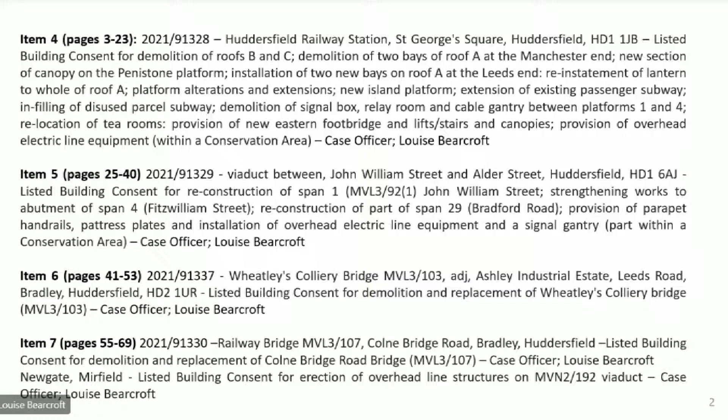So the purpose of today's committee meeting is for officers to brief members on 9 listed building consent applications which have been submitted by Network Rail. The works for which listed building consent are sought are required as part of a scheme to upgrade the railway between Huddersfield and Westtown.

On the 31st of March this year, Network Rail submitted a draft Transport and Works Act order to the Secretary of State. The scheme, which runs from Huddersfield to West Town, is part of a wider programme of work to improve the Transpennine Railway between Manchester, Huddersfield, Leeds and York. The proposal is to increase service capacity and improve journey time through electrification and the provision of 4-tracking across the route. The estimated cost of delivering the project is just over £1.4 billion, and if the order is granted, would represent a significant investment in the district.

In conjunction with this, Network Rail have submitted 9 listed building consent applications which are before members today. These applications have an automatic call-in to the Secretary of State, and they will be considered at the same time as the Transport and Works Act order.

So in the interest of clarity, as Julia said, it is the Secretary of State and not the local planning authority who is the determining body. The local planning authority do, however, have the opportunity to comment and provide any comments to the Secretary of State within a period of 42 days, extended to 45 days due to the bank holidays.

So the purpose of today's meeting is to brief members on the merits of each listed building consent application and to seek members' views on the heritage implications of each to formally submit to the Secretary of State.

There are 9 application sites which follow the route from Huddersfield to West Town. The first 2 are Huddersfield Station, which is Grade 1 listed, and Huddersfield Viaduct, a Grade 2 listed structure sited between John William Street and Alder Street.

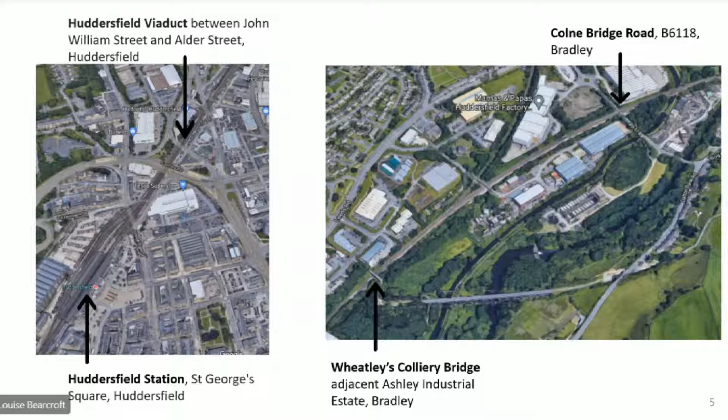The next 2 locations are bridges in the Bradley area, Wheatley's Colliery Bridge, located off Ashley Industrial Estate, and Colne Bridge Road. The next locations are at Mirfield Viaduct adjacent to Newgate, and Wheatley's Viaduct adjacent to Steneard Lane. The last 3 are in the Westtown Dewsbury area, including Occupation Bridge adjacent to Thornhill Road, Toad Holes adjacent to Watergate Road, and Ming Hill Bridge off Huddersfield Road.

The proposals within each application form a key part of the Transpennine Route Upgrade, and they have been developed in consultation with Historic England and Kirklees Council conservation officers over some years. The design development process included appraisal of alternative options to identify an approach which delivers Network Rail's operational requirements, whilst also meeting national and local policy requirements to minimise the impact on the heritage assets.

So the planning, balance and consideration of the applications take into account the benefits perceived from the railway upgrade scheme weighed against the identified harm to the assets.

For each application, there is a safeguard proposed through Network Rail's suggested condition to provide further technical detail within a Conservation Implementation Management Plan, or CIMP. This is proposed as a means to specify the various materials, techniques and task implementation methods necessary to detail the intervention works and demonstrate that the tasks will retain the authenticity, special interest and character of the heritage assets. This is a safeguard considered essential by officers and one which is welcomed.

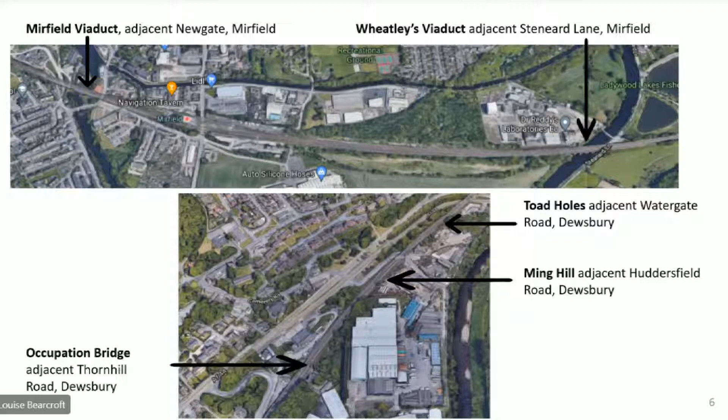So I'm Alex Davies, Head of Consents and Environment for Network Rail, and I've got my colleagues Tony Rivero, Town Planning Manager, and David Vernon, our Senior Sponsor for the scheme. Just hopefully this all works, so we're successful this time.

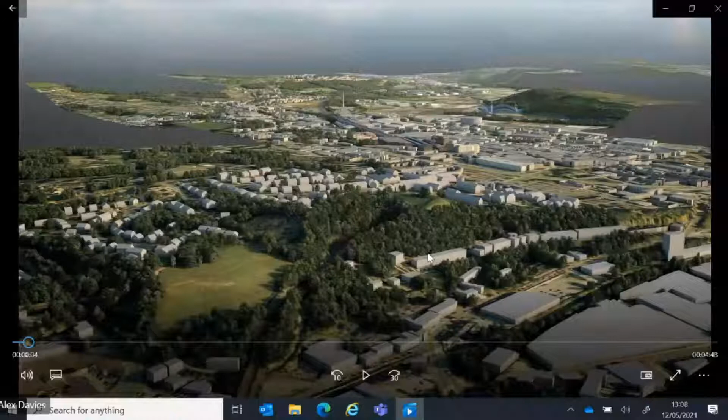So I'm just going to show you the fly-through. This fly-through was produced as part of our public consultation. I will just pause at the primary listed buildings. I'll just start the fly-through now.

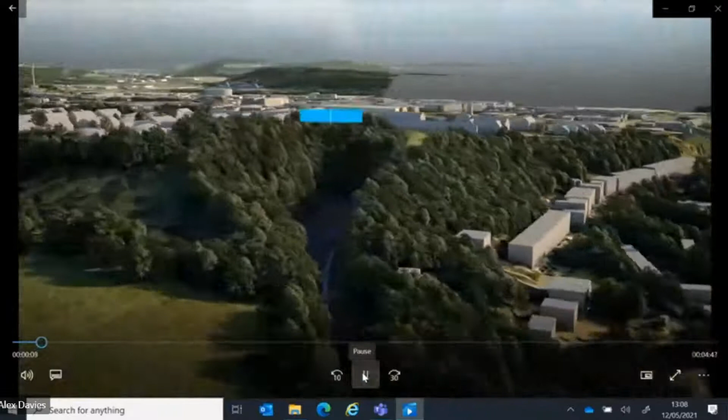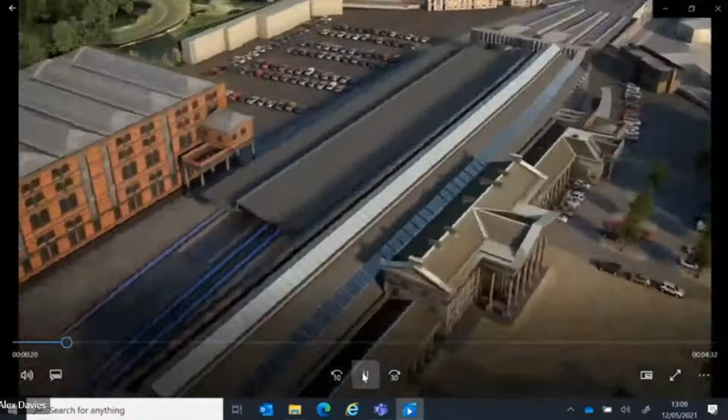So the scheme starts at Springwood Junction, just outside Huddersfield Station. As we go over the tunnels, we're doing works in those tunnels. And we come to Huddersfield Station, one of our key work areas. I'll just pause here for 1 second. The work we're doing here is demolition of the roofs and replacements. Roof A we're working on, extending it, and putting a new footbridge in at this location.

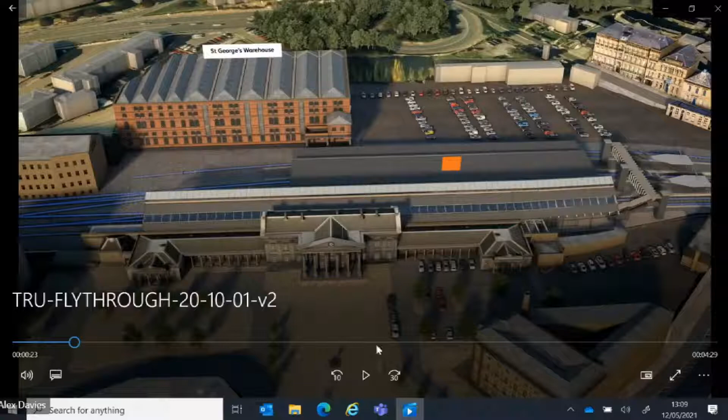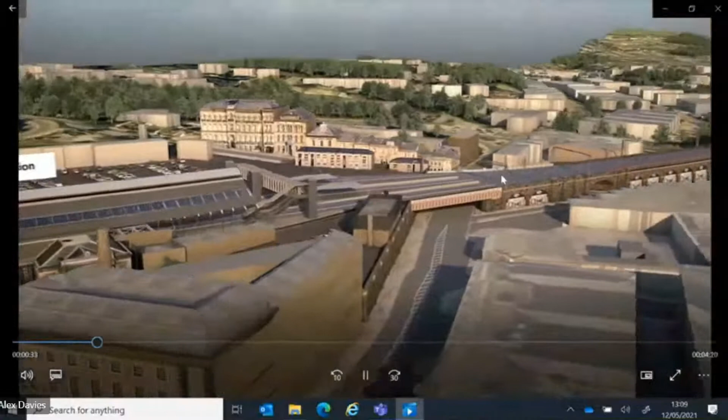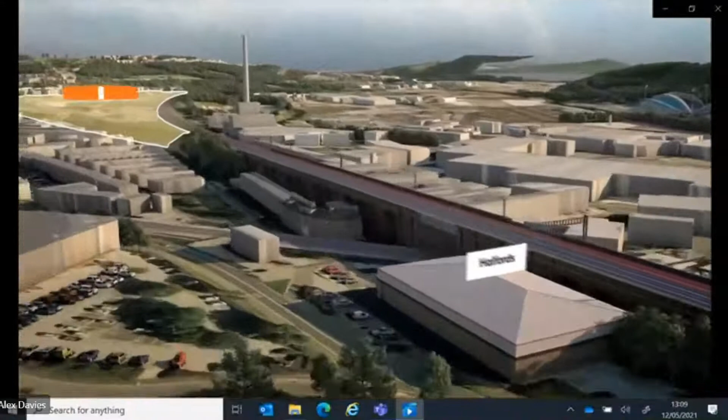I'll carry on now through the fly-through as we move across John William Street, where the bridge will be replaced to accommodate the remodelled station. Then we go to 4 lines through the viaduct, which is a listed structure, the blue and the red. We replace span 29, going through the works now. Hill House sidings is one of our key compounds.

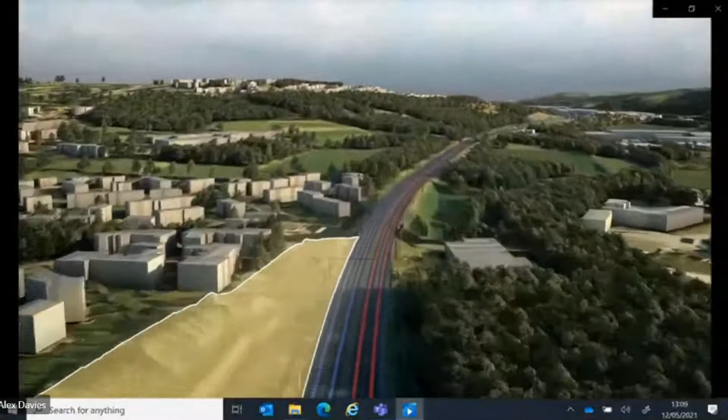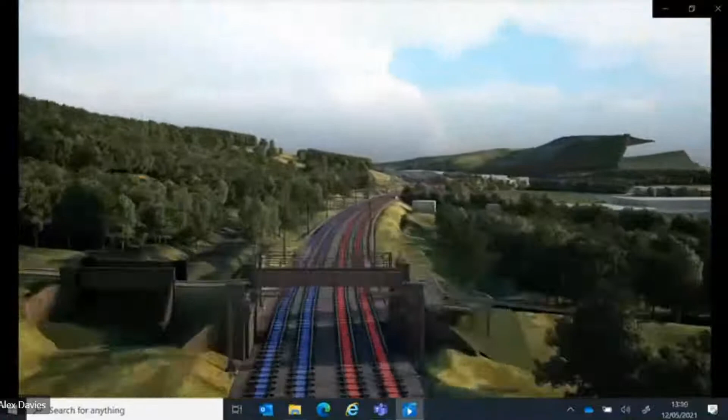This is all electrified railway as we come to the new, extended Deighton Station. The blue lines are the slow lines and the red lines are the new fast lines, so blue lines are for the stopping trains, red lines are for the fast services. And we come to Deighton Station over Whittaker Street Bridge.

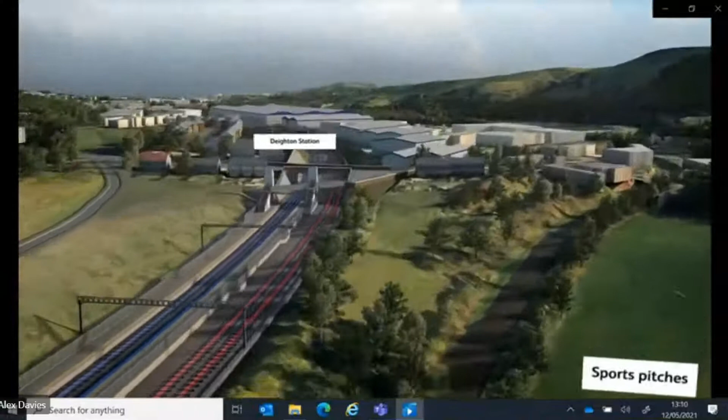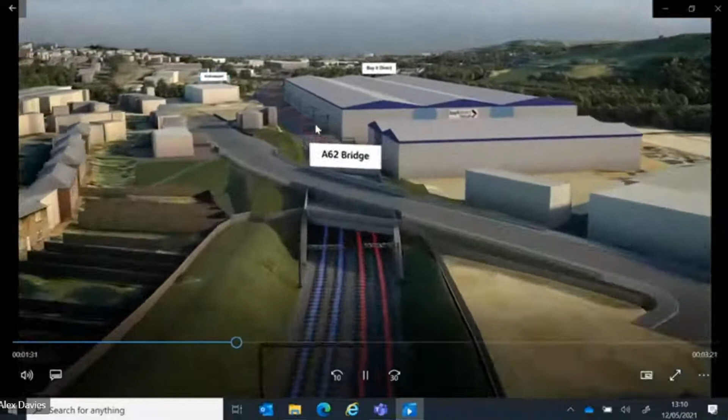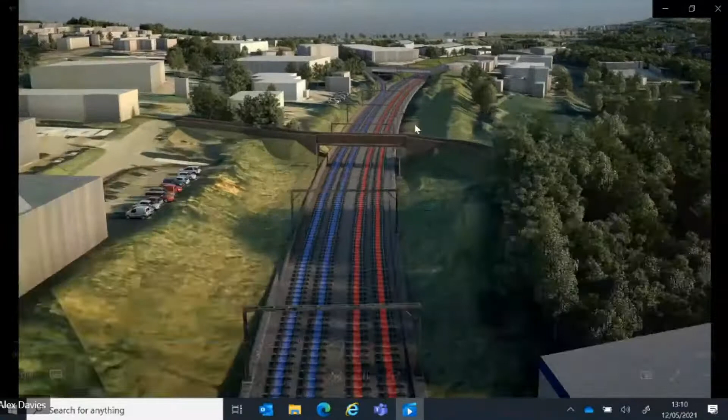We go through the A62 bridge, which will be built offline. Just pause here at Wheatley's. This bridge is rebuilt at Wheatley's, there's Wheatley's bridge. We come through Bradley Junction, and then to Colne Bridge Road, which again is rebuilt next to Bradley Access Point.

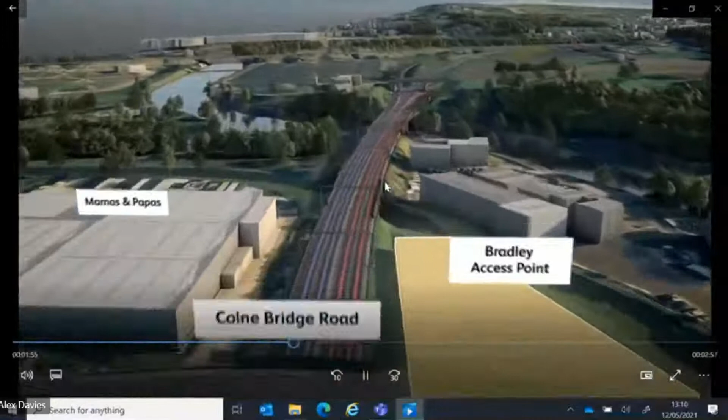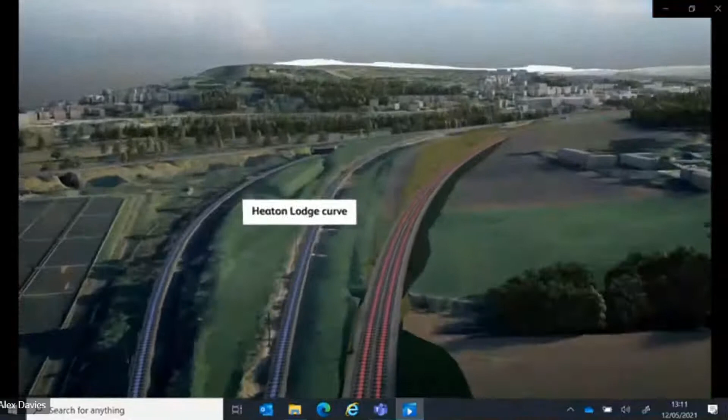Over the river, then you've got Heaton Lodge, a new line running to the right, and the slow line, the existing, to the left, and Heaton Lodge curve is built to your right there. We have the new footbridge put in for the current footpath, which runs through under the railway up to the Greenway.

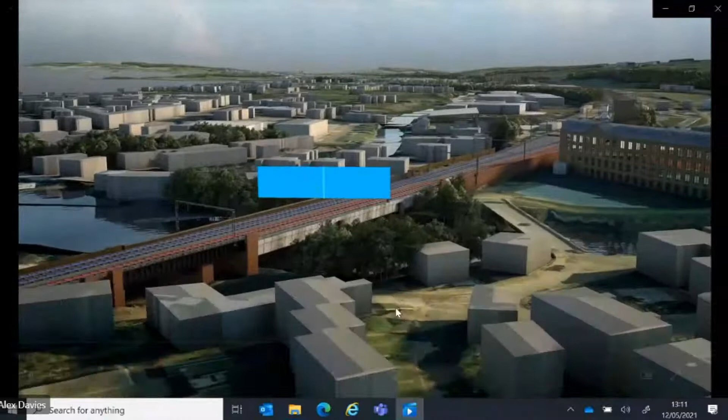Now we zoom on down to Mirfield. I'll just pause at Mirfield Viaduct as we get there very briefly. At Mirfield Viaduct, we're putting overhead lines across the viaduct - that's the primary work at this location. Go through Mirfield Station.

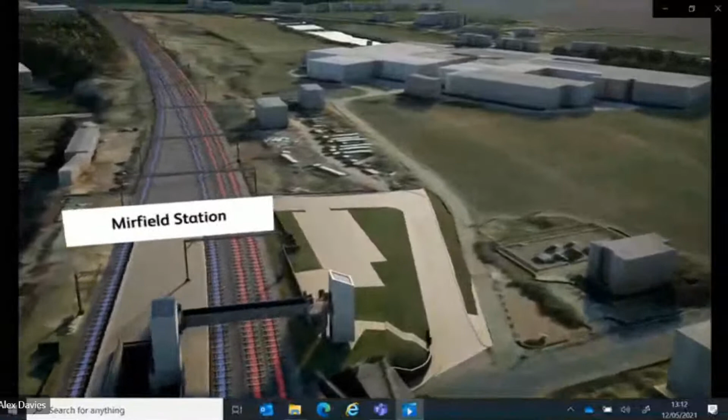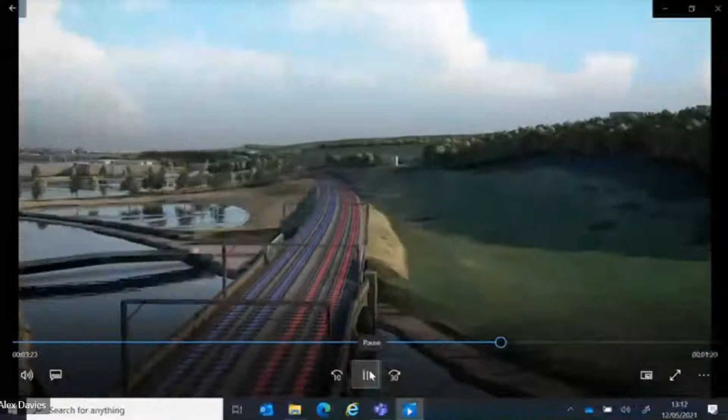Again, new lifts at Mirfield Station, new footbridge. So we come to Wheatley's. Again, just overhead line equipment being attached to that bridge there, through Sands Lane, coming up to Ravensthorpe.

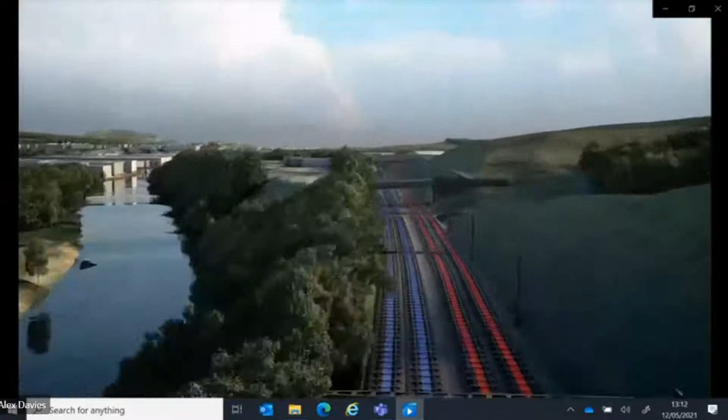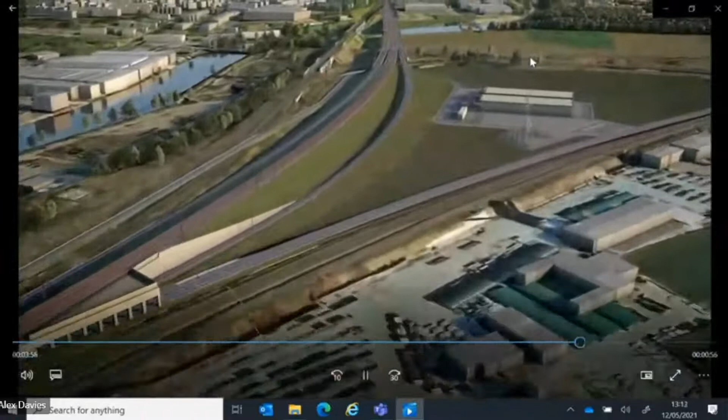Where there's a new station at Ravensthorpe to your left. Calder Road. Bridge is remodelled, and a flyover is put in to go over the canal and the River Calder, with a new feeder station to your right on the former landfill site. And you've got the Wakefield line to the right there.

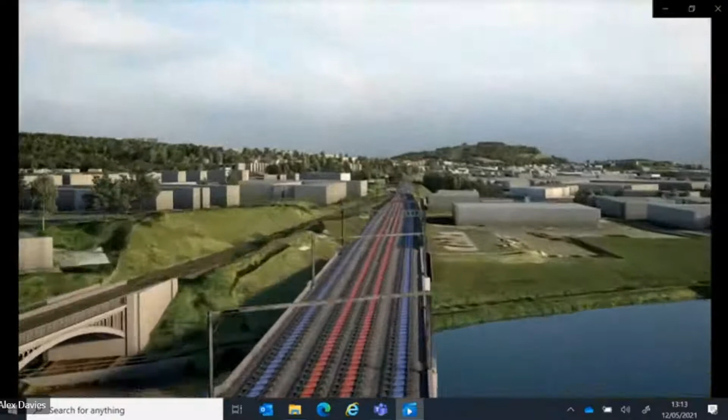And then we come to the final three listed building applications, which is Occupation Road, Toads Hole and Ming Hill. These are infills of those assets. You can't really see them from this fly through, but I'll just stop to give you a general indication as to where they are as we move round Thornhill Road Bridge.

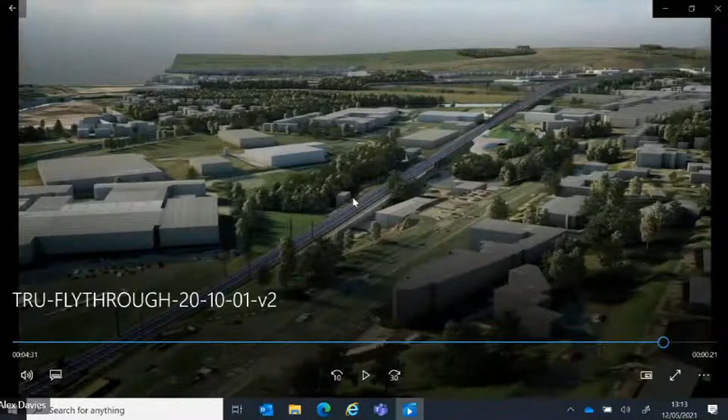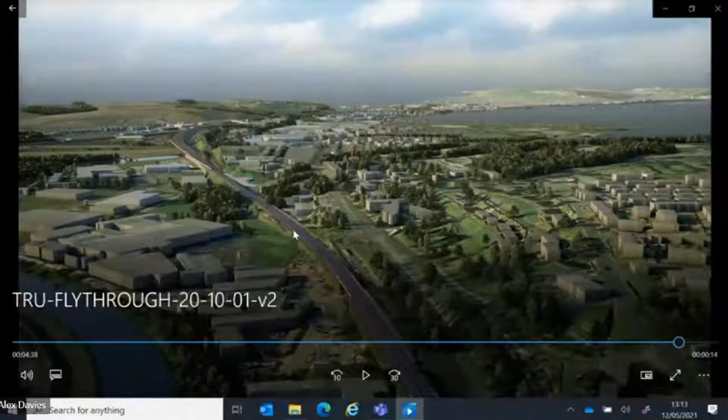So as we come to the end of the scheme and tie back in, roughly that's occupation. We're infilling there, and Ming Hill and Toads Hole are roughly there and there where my cursor is. So I'll just point those out again to you, roughly there and there. And that's the end of the fly through as we come to the end of the scheme at Mr. Sparkle's car wash.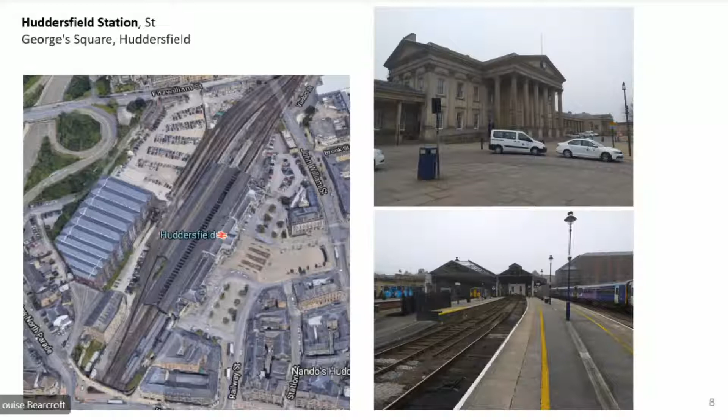And this will allow for deconfliction of passing and stopping services and to allow for the commencement of four-way tracking at this location. So this slide shows a bird's eye view of the station and its roof as existing and proposed. So the existing roof structure comprises two spans. The largest is known as Roof A, and this is between the principal station building and platform 4. The smaller is Roof B, which spans above platforms 4 and 8 and supports a cantilever canopy known as Roof C over platform 8. The proposed works include replacement of roofs B and C with a new roof canopy to a modern design, which would cover the new island platforms.

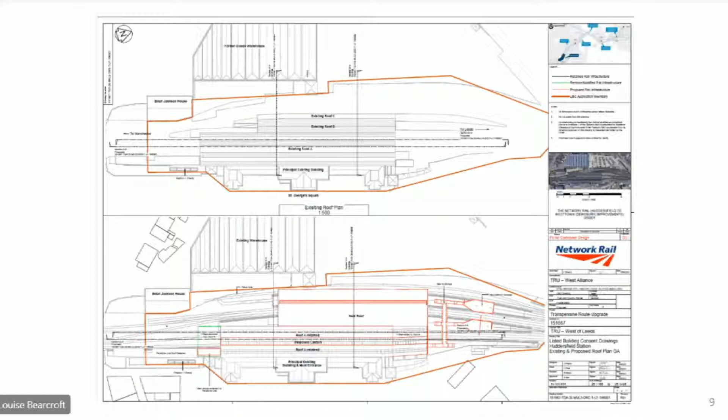The works also include the removal of 2 bays from the southern end of Roof A to allow for new track alignment, and the addition of 3 new bays at the northern end to provide additional coverage for the extended platforms. Roof A would be strengthened and the lantern reinstated, and the Penistone Line platform canopy will be extended northwards.

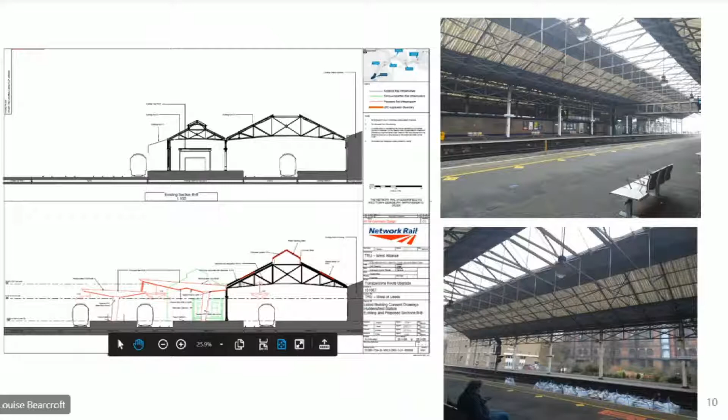This slide shows the existing and proposed roof arrangements. So the proposals would result in the complete loss of roofs B and C, and they will be replaced with a new modern roof with blade-like canopies, stepping down and linked with glazing to allow them to span over the tracks whilst providing clear views and natural light onto the platforms.

The proposal also seeks to rearrange the existing platform layout to extend their length, widen platform 1 and provide a new island platform as shown in this slide.

It is also proposed to construct a new footbridge to accommodate the forecasted increase in passengers and to provide emergency access and egress, as well as extending the existing passenger subway to provide access to the new platforms. This includes realignment of the subway stairs on the island platform and infilling of part of the redundant parcel subway to support the new track alignment.

Other works include the dismantling, storage and reconstruction of the timber boarded tea rooms with their position altered for the new narrowed island platform, and also then the installation of overhead line equipment throughout the station, aside from on the Penistone line platform.

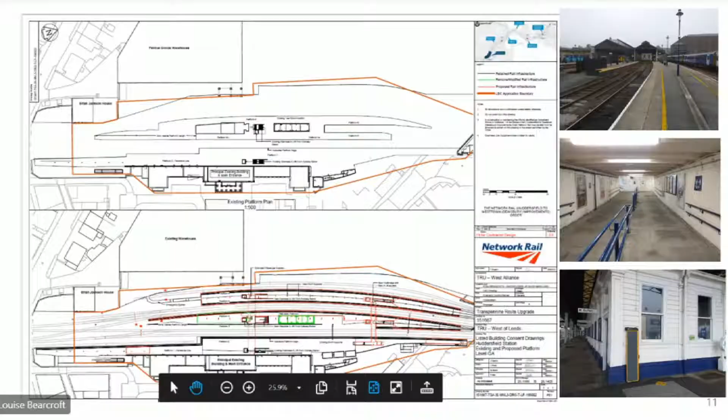The proposals represent significant change to the surviving historic fabric of this nationally important heritage asset. However, it is considered the most significant components of the station will not be adversely impacted upon, and the proposal are intended to enhance its purpose as a transport hub. The proposal will help secure its optimum viable use, and officers consider that a cumulative impact of all the interventions would amount to less than substantial harm to its significance.

This harm must therefore be outweighed by substantial public benefits to justify the proposed interventions. The public benefits of the wider railway upgrade include the delivery of electrification and carbon reduction, a reduction in journey times, an increase in capacity through more train services and longer trains, and improved journey quality. The proposals will also deliver some heritage benefits within the station complex.

These include the proposed strengthening of Roof A, the reinstatement of the lantern, and reinstating bays removed from the original roof length. They also include the retention and fireproofing of the tea rooms to enhance the longevity of this structure and its appreciation of its significance.

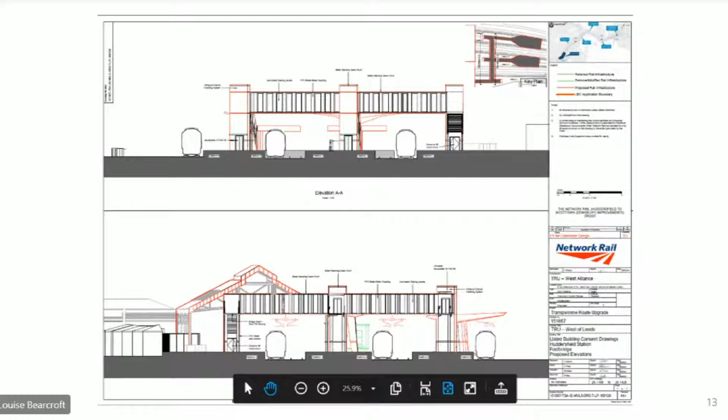The next slide is the Huddersfield Viaduct. This is a Grade 2 listed, 47-span viaduct, largely of masonry construction, which carries a Transpennine route. It currently carries 2 tracks for the majority of its length, increasing to 5 on the approach to Huddersfield Station. The spans primarily comprise arches which accommodate 3 roads beneath the structure and some businesses.

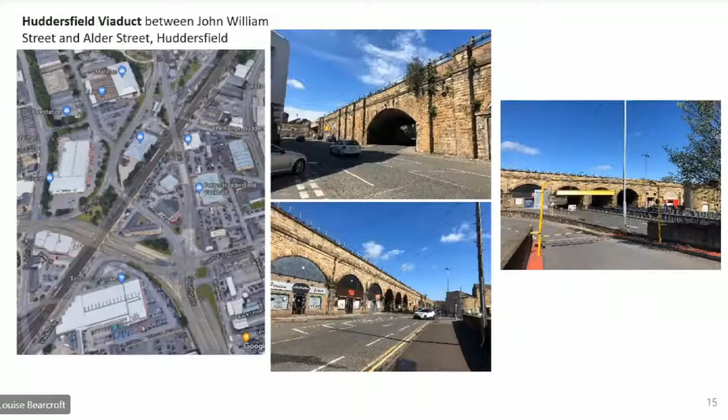The proposed works include installation of overhead line equipment along the length of the viaduct, with portals attached to the exterior of the structure on the east side and the southern half of the western side, and supported on the track bed on the northern half of the western side. It is also proposed to install a signal gantry over spans 2 and 3 for train movement into and out of Huddersfield Station, and to strengthen the spandrel walls at localised points along the viaduct where required.

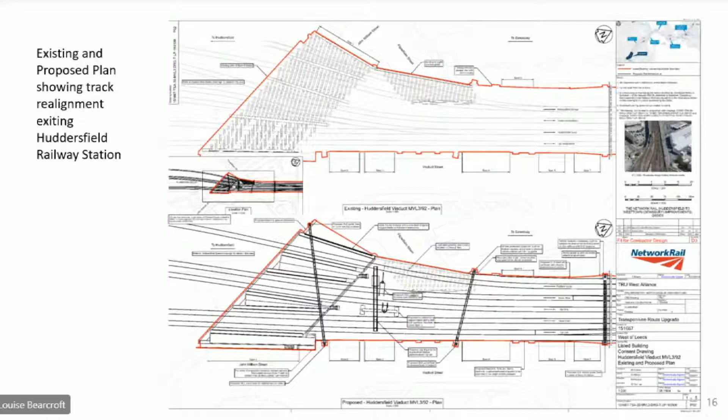The application seeks consent to increase the number of tracks along the deck of the viaduct. These will increase from 2 to 5 tracks up to span 17, then reduce to 4 tracks from span 17 to the northern end of the structure. It is noted that Huddersfield Viaduct was originally designed to accommodate a greater number of tracks.

At John William Street Bridge, it is proposed to replace the deck with a new steel span, which would also be widened on the southeastern side, with parapets incorporating reused elements of the existing cast iron edge girders, or designed in a style to match the existing structure.

At Fitzwilliam Street, it is proposed to reconstruct the northwestern corner of the abutment of the underbridge to be clad in masonry to match its external appearance.

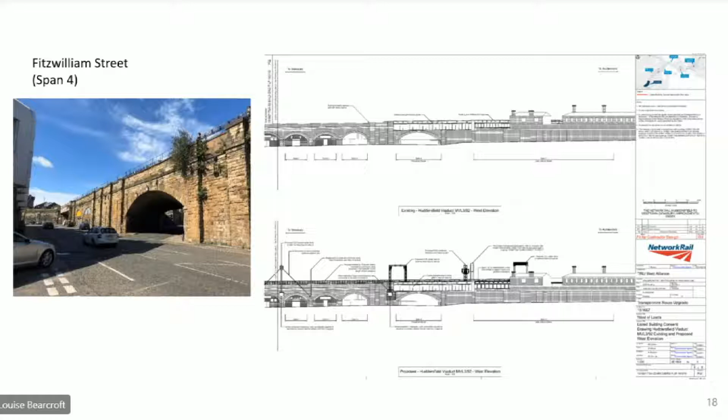The proposals represent significant change to the surviving fabric. However, it's considered its overall significance would not be adversely impacted to any significant extent. Officers considered the impacts would amount to less than substantial harm to its significance. Therefore, as before, it's necessary to evaluate whether the proposal can demonstrate substantial public benefits to outweigh this harm.

The public benefits of the route upgrade have been discussed in the previous application. They include the delivery of electrification, carbon reduction, reduction in journey times, and increase in capacity and improved journey quality. In addition, for Huddersfield Viaduct, the proposals will sustain its viable use, ensuring the longevity of the structure will remain. Officers considered these public benefits provide the necessary justification to enable support for the proposed works.

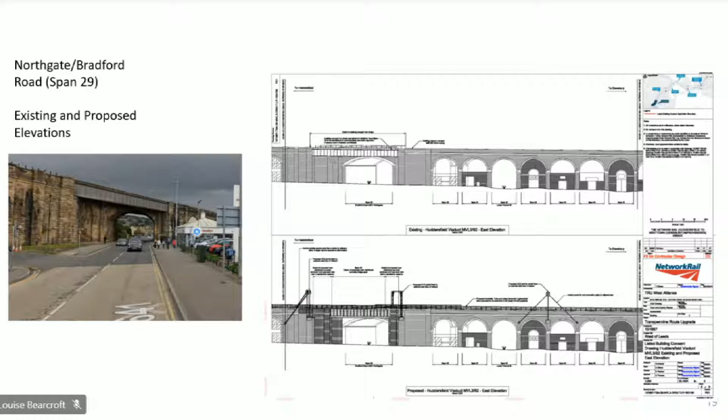Councillor Pinnock: Anybody who travels into Huddersfield cannot fail to notice this huge viaduct. It is a very significant element in the landscape, and what I've heard so far will clearly enhance what it does, and I think will ensure that no damage is done to the appearance of the viaduct, so it's able to fulfil its doubled function from what we have at the moment. That's all good stuff, in my opinion, and I will look forward to the management plan to see how it's actually going to be done.

Councillor Bellamy: I mainly agree with what Councillor Pinnock said. My only concern would be how long this is going to take and the disruption that it's probably going to cause around the roads there, because they're extremely busy roads, and I'd be interested to see how they're going to manage that side of it.

Councillor Patrick: I haven't really got a problem with this at all.

I did hear there that they were talking about reusing some of the ironwork on the John William Street Bridge, and I just thought, well, why reuse it? Why not just simply replace it with the same design? The other thing is, when you look at these structures, albeit that they are listed, they do need some work doing to them. I'm just wondering if, as a result of these changes, there will be some enhancement work done so that they are repaired where they need repairing. Thank you.

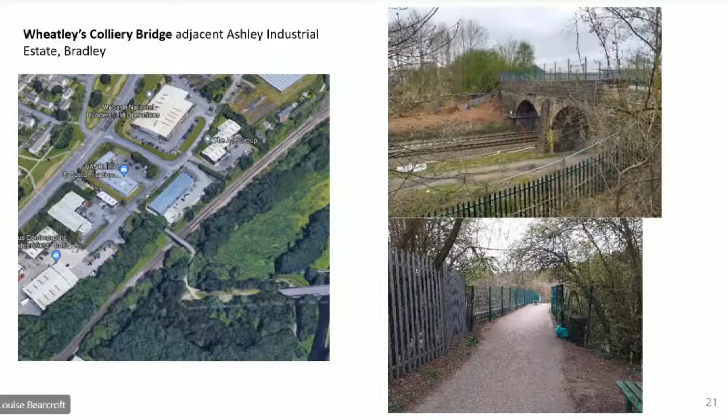Thank you, Chair. So the next one is Wheatley's Colliery Bridge. This site comprises a Grade 2 listed railway bridge, known as Wheatley's Colliery Bridge, which is accessed from Ashley Industrial Estate off the A62 Leeds Road. It's a two-span masonry arch pedestrian and cycle bridge, which carries the National Cycle Route 66 over the railway. The application seeks listed building consent to demolish the bridge and erect a replacement.

The TRU programme requires the railway lines to be realigned and increased from 2 to 4 lines at this location. This new track alignment would clash with the northeastern abutment and intermediate pier, while the bridge's existing arches have inadequate headroom to accommodate the overhead line equipment. It is therefore proposed to demolish the bridge and replace it with a new structure to meet the required horizontal and vertical clearances. Alternative options have been explored during the design development process, including adjusting the horizontal rail alignment to fit the existing tracks and the new fast lines through the arches of the bridge, as well as adjusting the vertical rail alignment through track lowering to provide adequate clearance for the overhead line equipment, and bridge jacking to increase the height of the arches. But these options have been deemed by Network Rail to be unable to meet their necessary safety, operational and buildability requirements, and would also potentially result in engineering challenges elsewhere along the route.

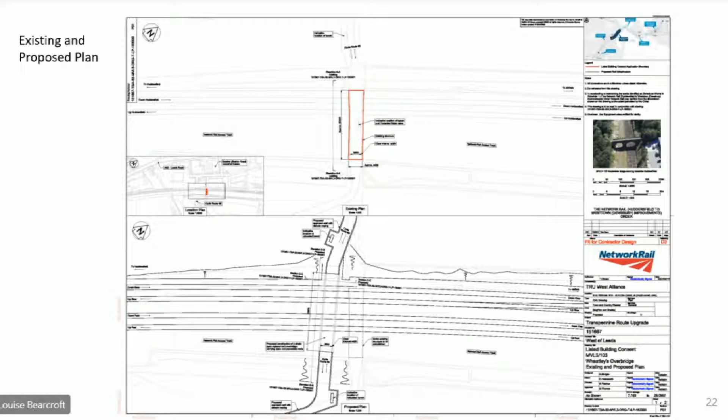So the new bridge would be built adjacent to the listed structure. It would have a weathered steel finish with cladding on the approach walls and abutments in stonework. It would have a deck to the same dimensions, suitable for cycling and pedestrian use, but it wouldn't provide views along the line as it does now. The detailed design would be secured through the Conservation and Implementation Management Plan.

The works here would result in a major adverse heritage impact resulting from the complete loss of the bridge's significance as a designated heritage asset. Therefore, in accordance with the requirements of the NPPF, paragraph 195, and Local Plan Policy LP35, it is necessary to evaluate whether the proposals demonstrate the necessary substantial public benefits to outweigh this harm. The exploration of alternatives concludes that demolition and replacement is necessary to deliver the operational requirements and objectives of the Transpennine Route Upgrade. The route upgrade is considered to be vital in supporting the north of England's long-term, low-carbon economic growth, better connecting people to jobs, services, education and leisure.

The increased movement of people and goods along this key part of the network would support a more economic and socially viable transport solution. The environmental and sustainability benefits would arise primarily from the electrification of the line, and the increased speed and capacity would partially be achieved through the newly aligned tracks, along the section of line currently spanned by Wheatley's Overbridge, with the 4-line track allowing express trains to bypass slower trains and freight services. Although the existing bridge was designed to span 4 tracks, the arches cannot accommodate the overhead line equipment or the new alignment.

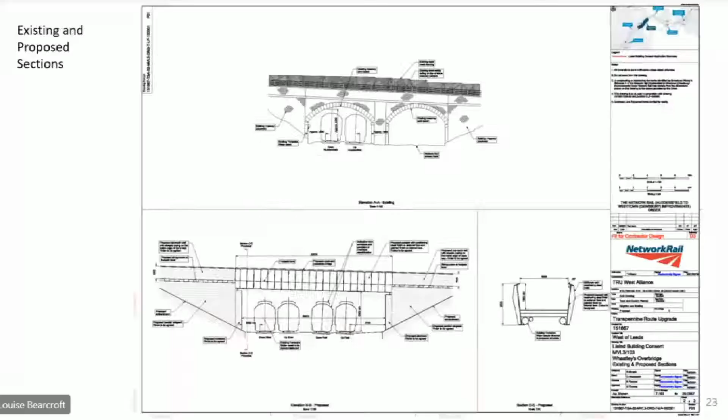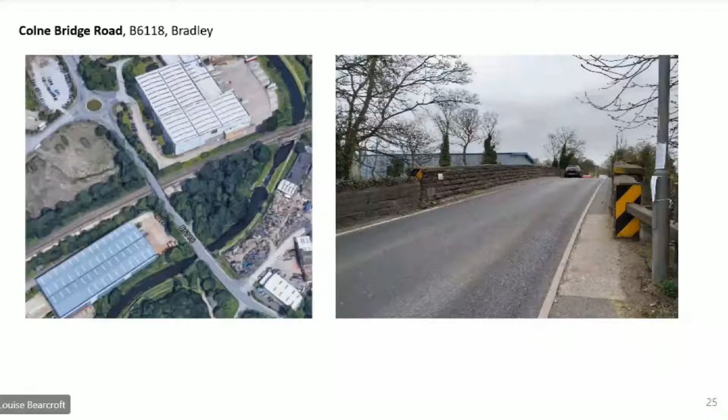Thank you, Chair. So this site comprises a Grade 2 listed Colne Bridge Road overbridge. It's a 4-span masonry arch bridge carrying the B6118 across the railway, an important local distributor road. The proposal is to demolish the existing bridge and construct a new offline bridge to the east of the existing structure. The necessity for this is that the existing bridge has insufficient clearance for overhead line equipment under the 2 central arch spans, and the new fast lines would clash with the pier between spans 2 and 3.

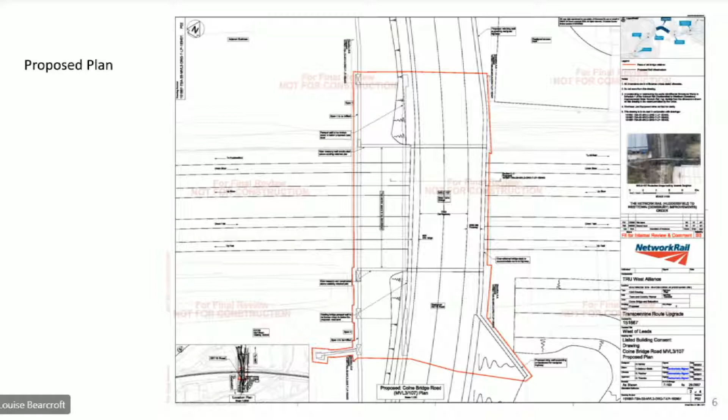The new bridge would have a widened highway deck and footway to improve vehicle and pedestrian access, and its offline construction would allow for a shorter period of highway closure. It would comprise reinforced concrete abutment walls and an integral deck formed from steel beams and a concrete slab. The parapets would be of painted steel and raised in height, becoming a 1.8 metre high solid metal enclosure.

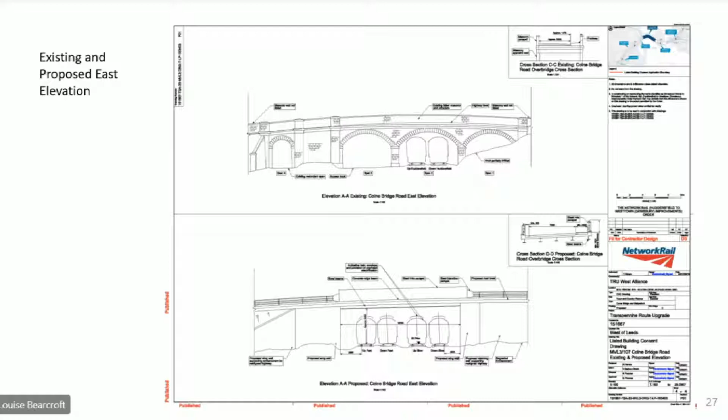On completion, the central section of the listed structure would be demolished to accommodate the overhead line equipment. Parts of the original structure to the north and south of the track would be retained in a modified form, with the exception of the southeast wing wall, which would be buried below the new highway alignment. The eastern parapet walls would be partially lowered to accommodate the new highway alignment, and the remaining arches would require infilling to add structural support.

The exploration of alternatives did conclude that the demolition and replacement is necessary to deliver the operational requirements. I won't repeat the benefits of the TRU as we've just spoken about them, but in this location there would be 4 tracks, and the increased speed and capacity would be partially achieved through this area, which is spanned by the Colne Bridge Overbridge. So although the existing bridge was designed to span 4 arches and 4 tracks, the arches could not accommodate the new alignment or the overhead line equipment.

The new design proposals here would provide public benefits with respect to the improvement of the highway for vehicles and pedestrians. The new alignment would enable the road to be widened to the required standard width for a highway subject to the current use, with improvements to visibility for drivers as well as a widened and improved footway. The replacement structure would offer an improved highway layout for users that is compliant with current standards. The road is an important local route, and upgrading the highway through this section would constitute a significant public benefit.

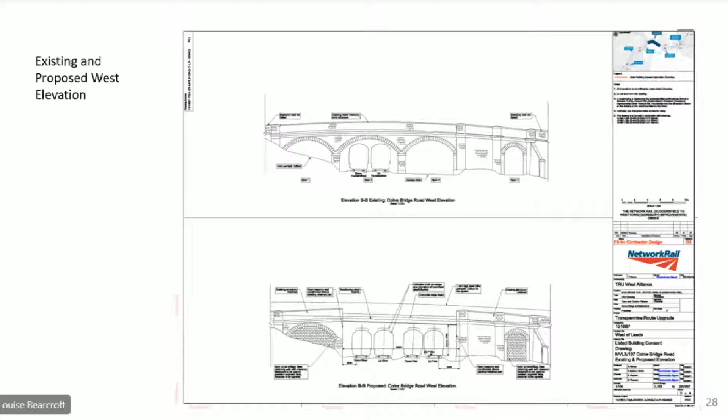Again, the demolition of Colne Bridge Overbridge is regrettable, but officers consider its loss may be considered to be outweighed by the substantial public benefits that would be facilitated by its removal. And again, as per the previous application, the major adverse impact may be partially tempered by managing delivery of a high level of design quality for its replacement, which would come through the Conservation Implementation Management Plan. Thank you, Chair.

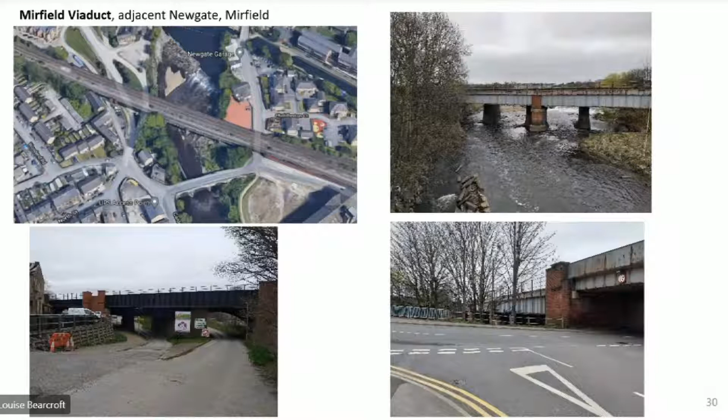Moving on to Mirfield now. This site is the Mirfield Viaduct, a railway viaduct spanning the River Calder, approximately 300 metres west of Mirfield Station. It is a masonry structure comprising 12 spans, with a brick and steel extension to the south added in the 1930s and not included in the listing. The structure carries 3 tracks, 2 on the listed northern side and 1 on the southern side, and the alignment of the historic 4th track is currently redundant.

To enable the viaduct to support the electrified rail service, 3 portal structures are required to be fixed to the structure. The distances required between the portals necessitate placing portals on the viaduct itself, as the length of the viaduct is too great for the wires to span across. The portals will be sited inboard of the parapet with no alteration to the masonry parapet required. On the non-listed side, they will be fixed to the exterior of the parapet. The proposed works also include increasing the number of tracks from 3 to 4, however the new track would be placed on the 1930s extension side, and in itself that would not require listed building consent.

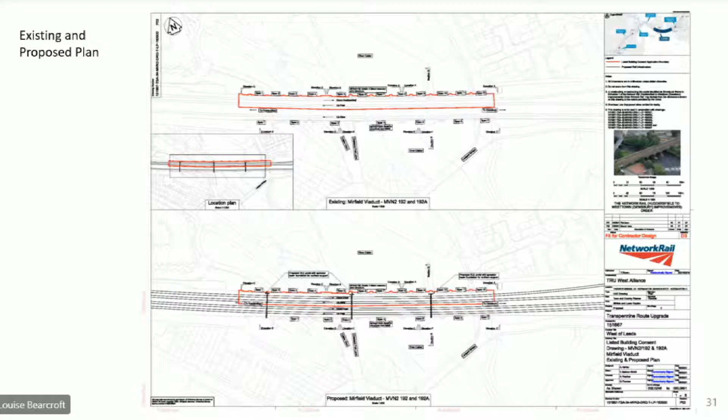The proposals represent a modest change to the surviving historic fabric of the Grade 2 listed building. However, the overall significance of the viaduct would not be adversely impacted to any significant extent, and the proposals would enhance its design purpose and optimum viable use as a railway bridge. The cumulative impact of the fabric interventions would amount to a low level of less than substantial harm to the significance of the designated heritage asset, and again we weigh that against the public benefits in the planning balance.

We consider that the works are integral to achieving the overall benefits of the wider Transpennine route upgrade. The reduction in journey times along this part of the route will be partially facilitated by the works on Mirfield Viaduct. The proposals constitute a sustainable approach to the future of Mirfield Viaduct as a nationally significant and historic component of the wider Transpennine route. The delivery of the electrification, which releases passive and active measures to deliver reduced energy demands and carbon reduction, would therefore be a substantial public benefit, and officers consider this would provide the necessary justification to support the proposal.

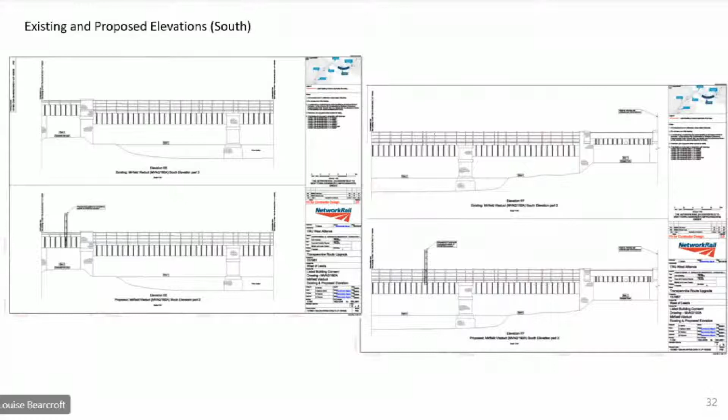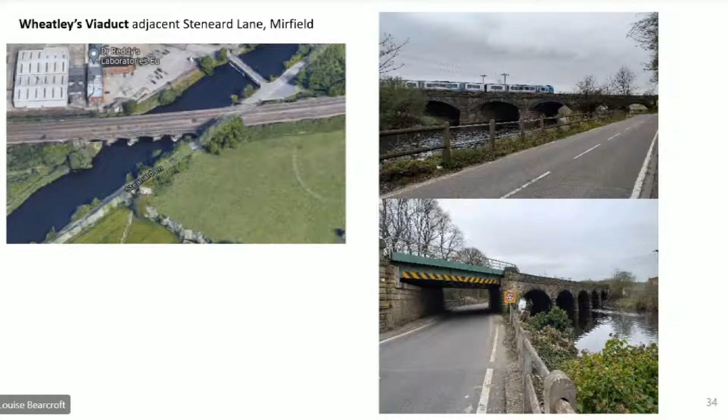So the next application is Wheatley's Underbridge. This site comprises a Grade 2 listed Wheatley's Underbridge, a railway viaduct spanning the River Calder, approximately 1 kilometre to the east of Mirfield Station. The viaduct comprises 5 arch spans. A brick and masonry extension to the south was added in the early-mid 20th century, and the structure carries 2 tracks of the Trans-Pennine route. The proposal is to add 2 overhead line equipment portals to the structure to enable the viaduct to support the electrified rail service.

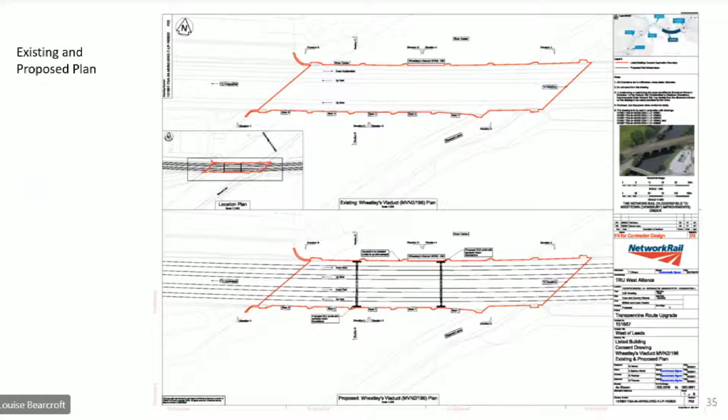Their construction would require local temporary removal of sections of the parapet, to be reinstated on completion of the works. The portals will be located as close to the pier centre lines as possible. In addition, a handrail will be constructed on the north parapet to provide protection to rail workers undertaking maintenance works and passengers in case of emergency. This would be in a similar style to the existing handrail atop the southern parapet.

The proposals would represent a modest change to the character and appearance of the Grade 2 listed heritage asset. However, the overall significance of the viaduct would not be adversely impacted to any significant extent, and the proposals would enhance its design purpose and optimum viable use as a railway bridge. The cumulative impact of the fabric interventions would amount to a low level of less than substantial harm to the significance of the asset. It's therefore necessary to evaluate whether the proposal can demonstrate public benefits to outweigh the harm. It's considered the proposals constitute a sustainable approach to the future of Wheatley's Underbridge as a nationally significant component of the wider route.

The delivery of electrification, as stated in the other applications, which releases passive and active measures to deliver reduced energy demands, would be a substantial public benefit, and this would provide the necessary justification to support the proposal. The identified adverse heritage impacts are relatively modest and can be managed by use of the Conservation Implementation Management Plan. Thank you, Chair.

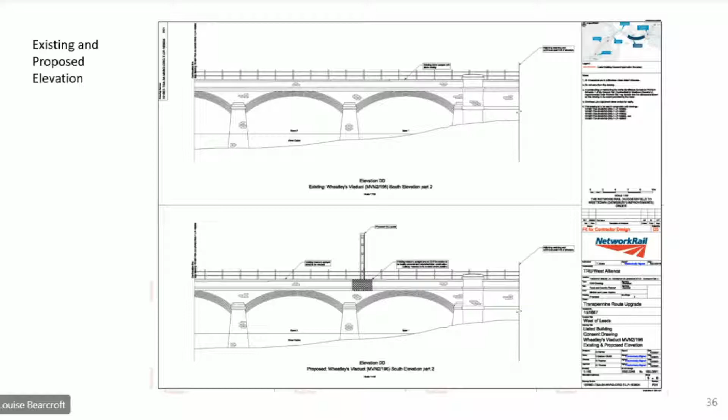Members? Martin? Yeah, thanks, Chair. I was tempted to say ditto, but you've got to stress that again.

And we just don't know. The work they're doing could potentially - there's works they've planned on Steanard Lane, or compulsory purchase orders. We don't know the impact on the businesses from this.

So whilst the heritage is one aspect, I think we should be looking holistically. It's very disappointing that we're getting to this stage and being told, that's nothing to do with us. That's been a running theme - it's not in the project remit, it's nothing to do with us. Well, it should be, because we're all here to see the public benefit and see this improved, but it's got to be done in the right way.

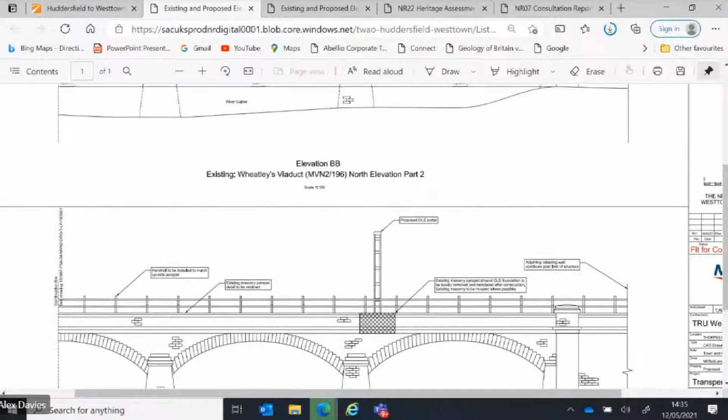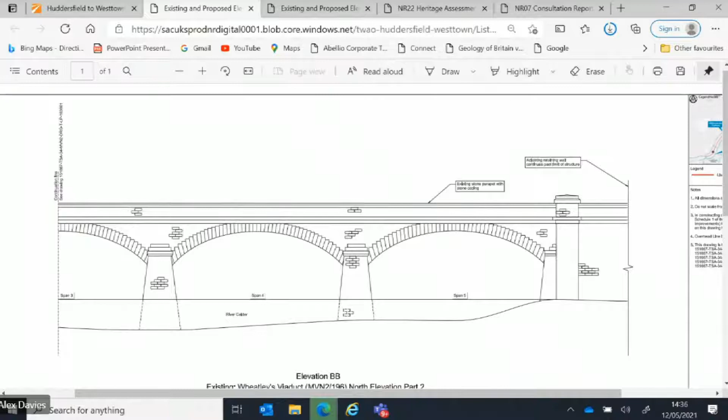Just on Tony's point, this is Wheatley Viaduct. We've submitted heritage assessments for each listed building consent, and detailed drawings at the level of design we've got. This is in line with other processes we've undertaken - going back recently with Manchester City Council, we have a level of design, and then as we progress we work with the council through the construction implementation management plan on that detail. But is this the drawing you wanted up, Tony?

No, Alex, it was the cross section. But that does show the proposed OLE portal, in terms of its elevation. I can get a cross section up, but just so for the benefit of all the councillors, it's all on Network Rail's website - we can send links out, the heritage assessments, the application form. Is it the existing and proposed cross section you wanted, Tony? That's the one. If I just open that up, there you go, so you can see.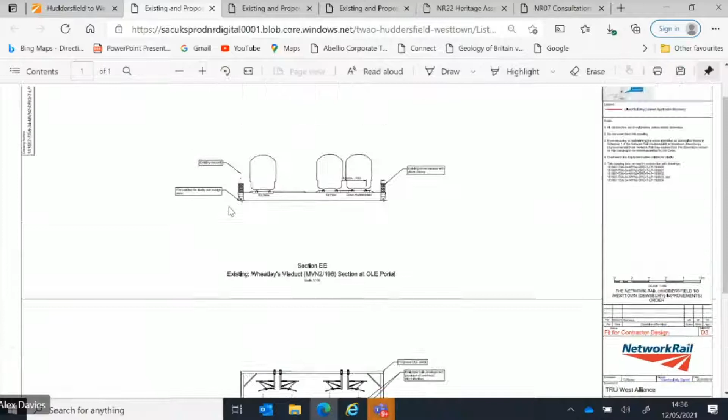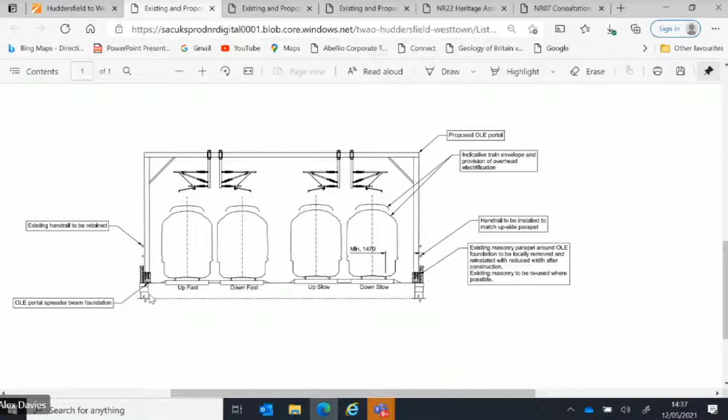So you can see there's the existing with the 3 tracks, and then it shows the 4 tracks being put down, and basically it's a steel goalpost which spans the entire width of the viaduct, but there's only 2 of these. The peculiarity about Wheatley is the skews are not quite right, because normally we would want to position the overheads in line with the pillars so there's no visual jarring in terms of its appearance. But because of the skew at Wheatley, that's not quite possible, so they're on a slight skew.

Sorry, I think we lost Tony there. Sorry, I pressed mute by mistake. But I hope that gives Councillor Patrick some idea of what it will actually look like. Thank you, Chair. Yeah, thanks. Thank you. No problem. Thanks, Steve.

Thank you, Chair. Again, that comment there - if anybody wants to have a look, the information is on the website. Under normal circumstances, if we weren't restricted to meetings, you'd have been making a decision today and it wouldn't have been a consultation. How the heck can you make a decision if committee members are being told to go look on the website? If it was any other application, I'm sure members would have been speaking in strong terms about the poor presentation by the applicant, that they haven't had the information before them.

The sections you've just been shown, great, it shows it over the river. But the point I made was that railway bridge also goes over Stennard Lane - is that not on your drawings, Network Rail? Can we see the impact, what you're doing over Stennard Lane and the impact it will require on the road? Possibly nothing. Well, then we need to know, don't we? If they're doing nought, I'll be a lot happier. I don't exactly paddle up and down the River Calder, so it's not a navigational route, but Stennard Lane and Granny Lane is a navigational roadway.

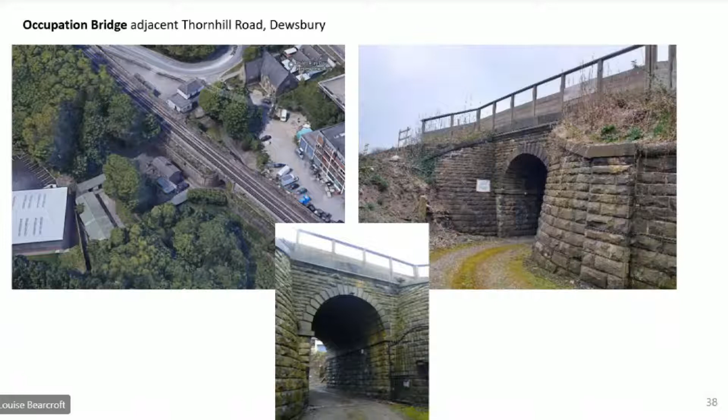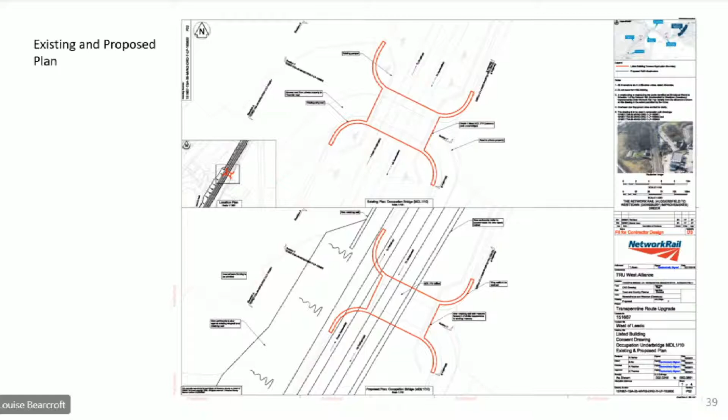So this one is Occupation Underbridge. It's actually quite difficult to see from nearby roads. It's grade 2 listed, located a short distance off Thornhill Road, approximately 1 kilometre to the southwest of Dewsbury, a single span underbridge which accommodates a driveway providing access to a private property to the southeast of the railway. At this location, it's necessary for the track to be realigned to the northwest of the existing bridge deck to deliver the required line speed increase. So here it's proposed to remove the access and infill the underbridge with a mixture of granular fill and foam concrete under the existing arch.

A masonry clad retaining wall will be constructed on the southeastern side of the arch, slightly recessed from its face. On the northwestern side, a battered embankment of granular fill reinforced by geotextile will be constructed against the structure, obscuring the arch face and the wing walls. The existing historic masonry architectural features and wing walls on the southeastern side will be retained, together with the existing parapet fence located atop the structure.

The proposals will retain Occupation Underbridge, but will result in significant erosion of its character and architectural interest, along with total loss of design function. The infilling would result in the loss of its significance, negating its appreciation as an accommodation bridge. The structure will be largely encased by the new embankment, and the major adverse impact would fundamentally erode its significance, amounting in this case to substantial harm. Therefore, it's necessary to evaluate whether the proposals demonstrate the necessary substantial public benefits that outweigh this harm. The exploration of alternatives by Network Rail has concluded that the infilling and encasement is necessary to deliver the operational requirements and to get the increased line speeds.

This would be achieved by the newly aligned tracks along this section of the line at Occupation Underbridge, allowing the express trains to bypass the slower passenger and freight services. While the loss of significance of this underbridge is again regrettable, its loss is considered to be outweighed by the substantial public benefits resulting from the increased speed and capacity of the route, which would be facilitated in this case by the infill and encasement of this bridge.

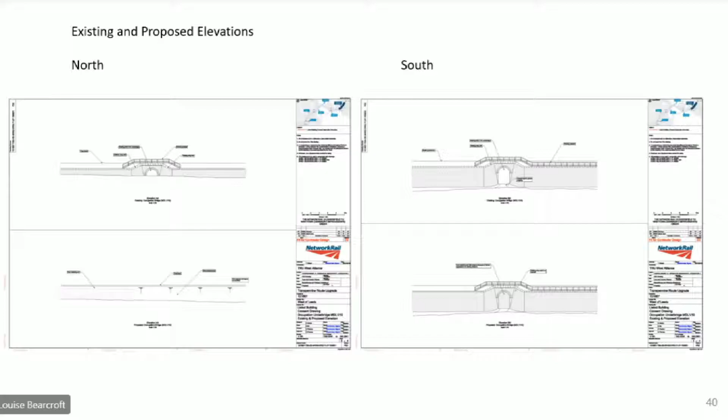Councillor Pinnock: Thank you, Chair. Can I just, before I say anything else, check please how many tracks are intended to go over this bridge here? Is it 2 or 4?

Network Rail, correct me on this, but I understand it's 4 and then goes down to 2 just beyond. Yes, it's 2 at that location, it comes back into 2. I thought so, thank you.

Well, I've actually visited this one. Went there this morning, and I don't like what's being proposed. What we're in effect doing is burying a bridge, or partially burying it, and I do strongly object to this.

I would like to know - mind you, I have to say it was actually very difficult to get at this bridge. It's not so bad on the north side where you can see it from the adjacent car park, but the south side is almost impossible to get at, regrettably. But nevertheless, it clearly has conservation value, this bridge. It's a really nice structure.

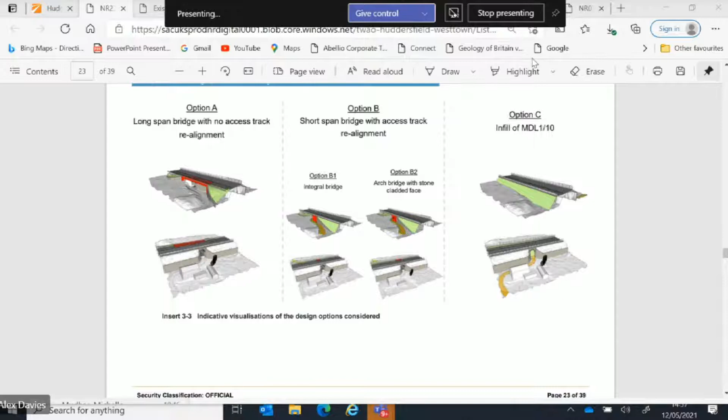I think members have made some really interesting and good comments on this one, which we will feed back as part of our consultation response. In terms of the balance put forward in the officer report, it is in support of the listed building consent, but some comments about whether any part of the existing bridge could be kept more visible - there's reference that the southern side will show some element, but as Councillor Pinnock referred to, it's more the northern side that you'd want us to flag up as part of our consultation response.

We're being asked to assess the impacts and give our opinions on the impact on the heritage asset. But what if we didn't do that as the priority, and instead assessed the impact on the public purse - then of course it's fine, you'd go for that option every time. But we're not being asked to do that, we're being asked to assess the impact on heritage. I know you're going to say it's a balance, but it just feels like we're operating with his arm up our backs. I don't know what anybody else thinks - some people on this committee haven't said a thing all the way through.

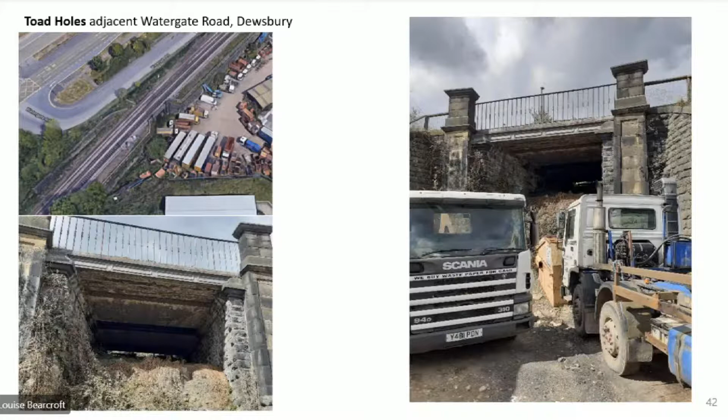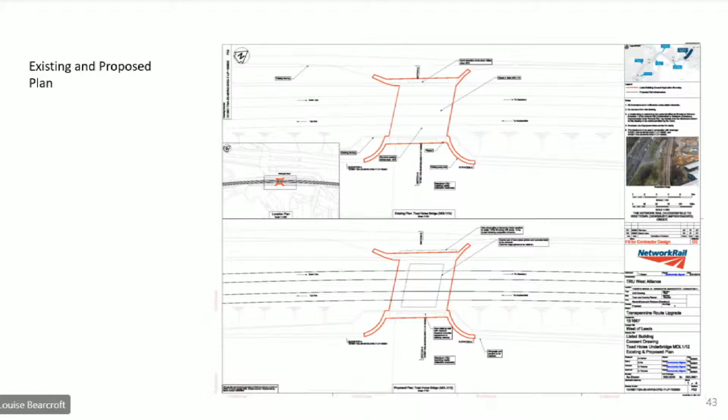The works comprise removing the existing partial infill and a central portion of the existing deck, while preserving the original edge girders and parapets. The bridge would be infilled using granular fill and foam concrete, and a masonry blockwork wall will be constructed along the south-facing elevation, recessed within the arch. Sheet piling buried in the embankment would also be used to support the earthworks.

The infilling is intended to retain architectural elements of the historic fabric which contribute to its significance. This includes the structure's parapets, cast iron edge girders and projecting pilasters. The new masonry retaining wall will be slightly recessed from the face of the existing structure to ensure that the bridge's architectural language would still be understood.

The proposals would represent a significant change to the character and appearance of this Grade 2 listed heritage asset. Overall, the significance of the structure would not be fundamentally compromised, and the proposals would retain its basic design purpose and optimum viable use as a railway bridge.

The cumulative impacts of the fabric interventions would amount to less than substantial harm to the significance of the asset, and it's necessary again to evaluate whether the public benefits outweigh these adverse impacts. I won't repeat the economic and social impacts here, but the works and those benefits will be partly facilitated by enhanced train speeds and capacity, which again is partly facilitated by the works on this underbridge. The proposals constitute a sustainable approach to the future of the underbridge and the delivery of electrification to deliver reduced energy demands, and we consider that this would be a substantial public benefit which would provide the necessary justification to support the works. Thank you, Chair.

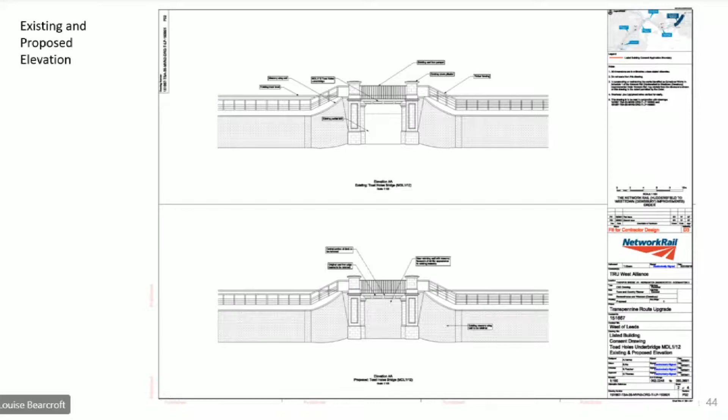They are both really rather attractive bridges with a lot of very nice detailing, and that is brought out in the committee report that we've got. They're curious, really, and I'm not absolutely certain that I would have known that either of them were there unless I'd been there this morning. I've been along the main road next to it on loads and loads of occasions, but I'm not absolutely sure that I knew these two bridges were there, because they've been filled in on the northern side, and it's all grassed over.

It's on the other side. It's in the yard of a waste merchant in this case, and as you could see from the first photograph that was shown, there's a lot of lorries there. But the bridge itself is really rather nice, and I just wonder whether it's possible to do something to enhance the appearance of both this one and the next one, because the next one's in a bit of a mess, frankly, on the northern side, so that they can be appreciated by people walking past, and it would just enhance the local area, it seems to me. Thank you, Chair.

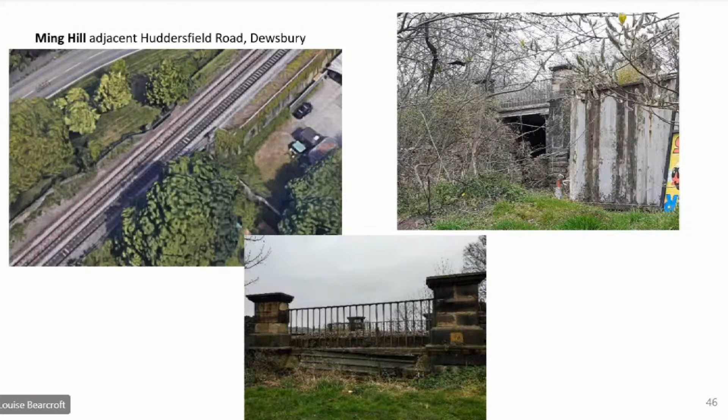It no longer accommodates access under the railway, as the northwestern approach to the bridge was infilled around 1970, leaving only the parapets exposed to facilitate the widened A644. The southeast elevation remains open, although the space underneath the structure is already partially infilled.

So the application seeks listed building consent to infill the bridge, and the works again are required to realign the railway tracks in the horizontal and vertical direction to increase the line speed on the two tracks above this bridge.

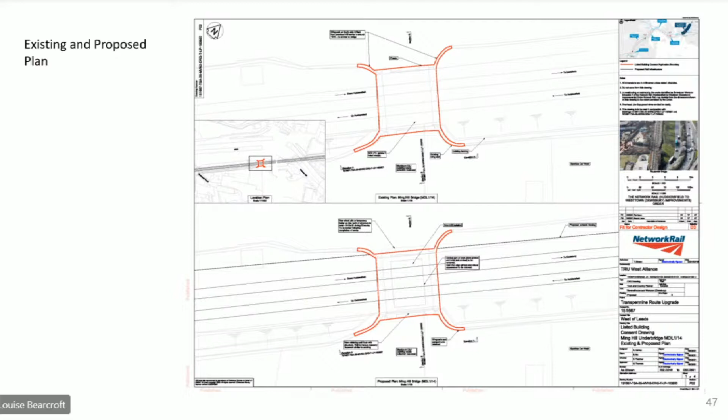The works comprise removing the existing partial infill and a central portion of the existing deck, whilst preserving the original edge girders and parapets. The cleared bridge would then be infilled using granular fill and foam concrete. The access will be closed by a new masonry blockwork wall constructed along the south facing elevation, recessed within the arch. Sheet piling buried in the embankment would also be used to support earthworks on the northwest side.

The infilling is intended to retain those architectural elements of the historic fabric which contribute to its significance. On this bridge, it includes the structure's parapets, cast iron edge girders and projecting pilasters. The new masonry retaining wall would be slightly recessed from the face of the existing structure, again to ensure that the identity of the structure would still be understood.

The works would result in a moderate adverse impact on the Grade 2 listed bridge. However, despite being extensively altered, the surviving structure of the bridge would remain intact and potentially visible and reversible, and would not fundamentally alter the significance of the heritage asset. The impact would consequently result in less than substantial harm to the value and significance.

And again, we weigh whether that can be outweighed by the public benefits. In terms of getting the line speed, this will be partially facilitated by the works on this underbridge. Sustainable use of the bridge would therefore provide a significant heritage benefit to ensure the longevity of the structure and for its design purpose. Therefore, it's considered the proposals constitute a sustainable approach to the future of the bridge as a nationally significant component of the route.

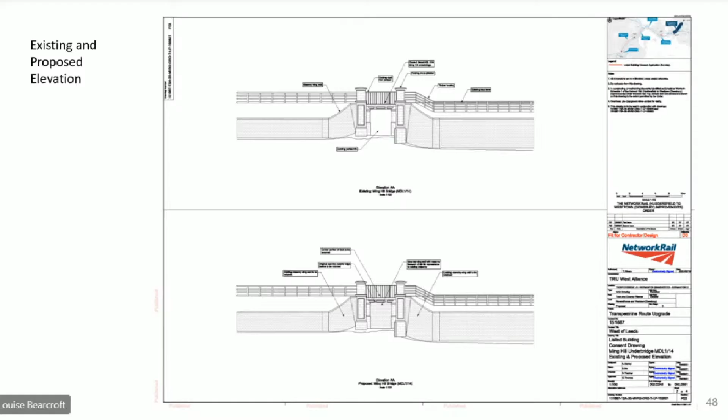Yes, thank you, Chair. Some of the same comments apply to this bridge. At the moment, there is a rather nasty piece of metal covering up a space on the northwest side of the bridge. You can sort of see it in the photograph that was put up just now, but it does look a mess, frankly. I couldn't get round the other side because it's in a yard, and I wasn't sure about access to it. Something I did notice this morning was that the boundary between the grass next to the main road and the railway line is not very secure.

People could, by climbing the wall, get on the railway line. It's not a very steep climb either. I don't know whether something's going to be done about that, but the railway line looks a bit vulnerable there, to be honest. I just thought I ought to point that out. Otherwise, what's being done to help this bridge seems very good, like the previous one. Thank you, Chair.

Any more comments, members? Will my comment about the trespass problem be noted? Yeah, has Network Rail, Louise, Julia picked up on that? Yes, thanks, Chair. I've made a note.